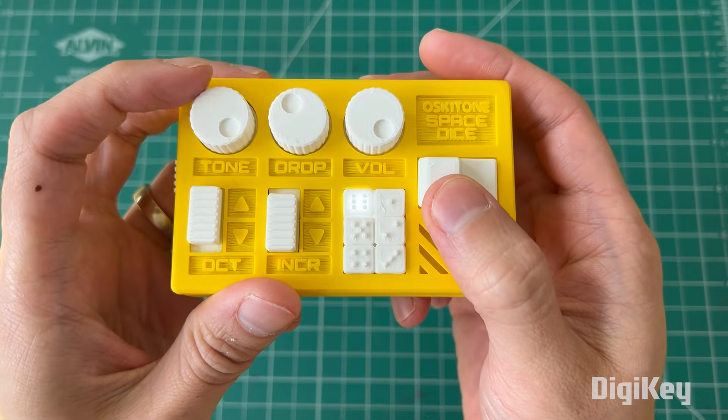This week on Maker Update: a robot with a walking neck, accessories for your Q, dice that go pew, and illuminated noodles for your ears.

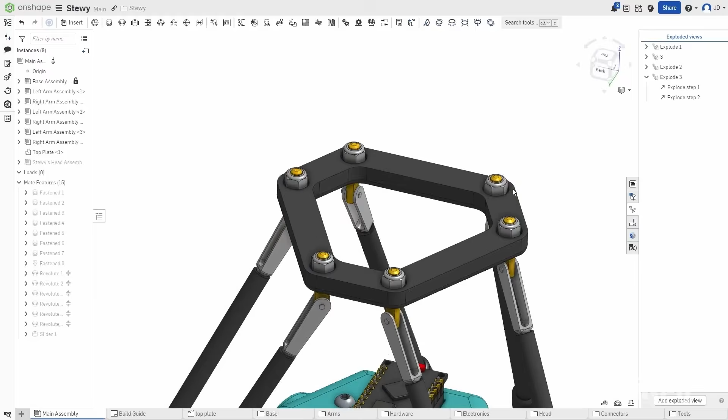The core concept here is a Stewart platform, typically a plate that can tilt in any direction based on the movement of mechanically controlled rods or actuators. In this case, the platform is Stewy's head, and the servo control joints that move the platform extend down to act as legs. So with the head and leg movement connected like this, you get this sort of crawling, head-bobbing motion when it's moving around.

It's not super smooth, at least not yet, but it has potential, and I think that's the most exciting part of this project. It's a solid idea that's not entirely figured out yet, and James is inviting us in to play with the design and improve how it works.

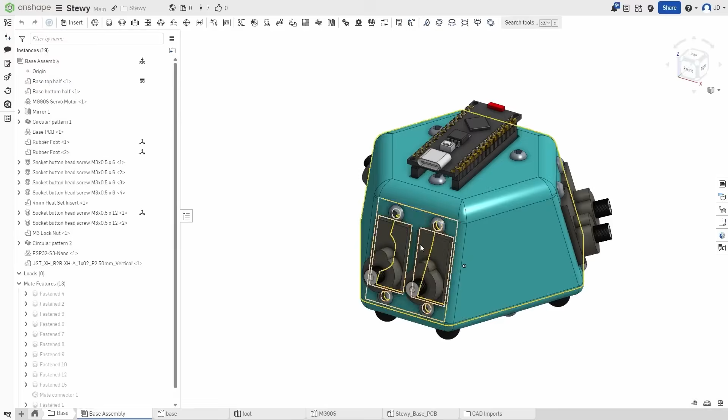In terms of electronics, you'll need 6 servos, which is pretty minimal for a project like this. All of those connect up to an ESP32 board in the base, which is where you'll also find an ultrasonic rangefinder for detecting nearby objects and a thumbstick for directly manipulating the robot.

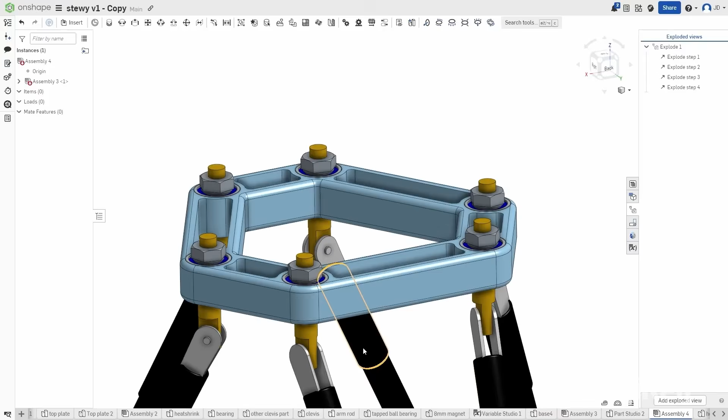I think the most interesting and unfamiliar part of this, though, is how the rods, servos, and platform all connect together. By placing bearings in the platform and encapsulating them as part of the 3D print, the hinged end of the rods can be bolted here and still allowed to twist and bend.

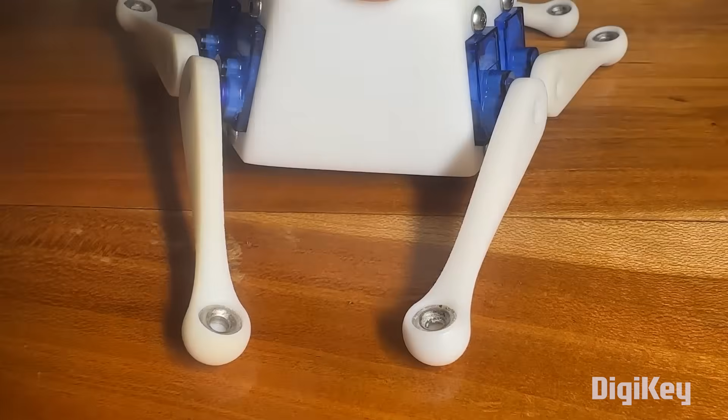But down at the servo end, the rods terminate in a kind of magnetic ring that rides on a threaded steel ball attached to a custom servo horn.

This means you have all of these joints that are deliberately designed to break apart in a way that's easy to reset. The complex, interdependent motion of all these rods means you're bound to move something past what it can tolerate. By having these magnetic joints, you really have permission to push the design and learn what it can take without spending hours in repair mode.

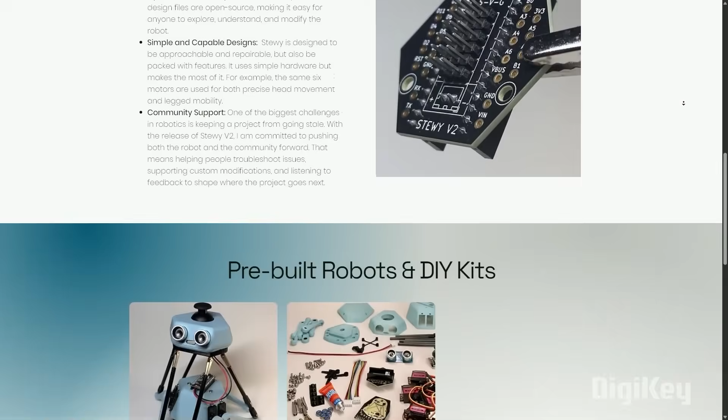Now for some news, and there's a lot to cover this week. Let's start with the bad news.

On their blog, Raspberry Pi has announced yet another substantial price hike to several models of their popular line of single board computers. Like the last increase, this one is again tied directly to the skyrocketing global cost and demand for RAM. To ease the pain a little, they've introduced a new 3GB version of the Raspberry Pi 4, sitting at around $83. If you don't need the latest, fastest model, maybe that's a good fit for your project.

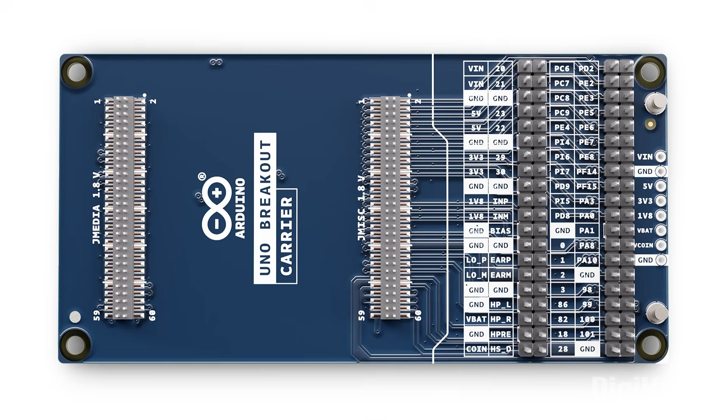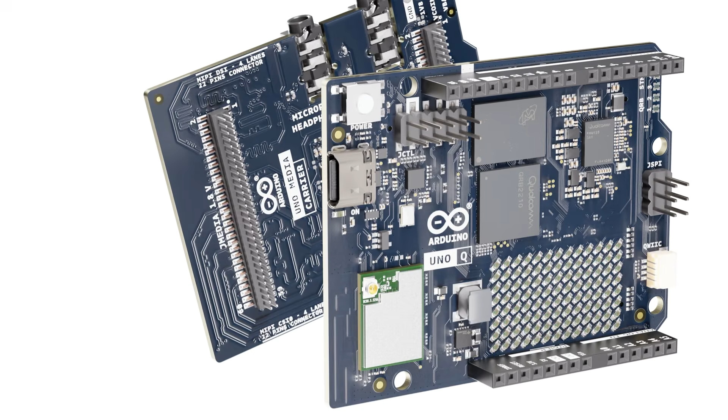From Arduino, we've got a new batch of products designed for the latest Uno Q board. The most notable, in my opinion, are these 2 expansion boards, the Uno Media Carrier and the Uno Breakout Carrier. Both boards are made so that you just push the Uno Q right onto a set of pass-through connectors. The Media Carrier offers connections for 2 cameras, a display, and audio input and output. The camera input conveniently uses the same 22-pin standard as the Raspberry Pi camera.

The breakout board is pretty self-explanatory. It's an inexpensive way to expose every available pin on the board, routed to headers that you can quickly prototype with.

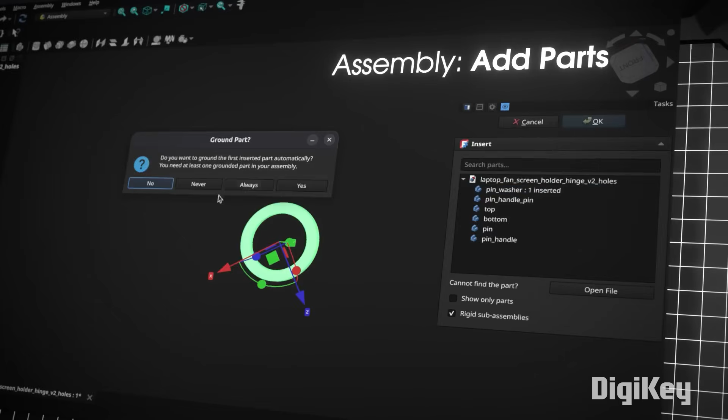The last bit of interesting news to share is that FreeCAD version 1.1 has just been released. This free open source 3D modeling tool now includes new options for lighting, widgets, snapping, sketching, creating holes, assemblies, and more. It's nice to see an open source tool like this thriving and gaining momentum.

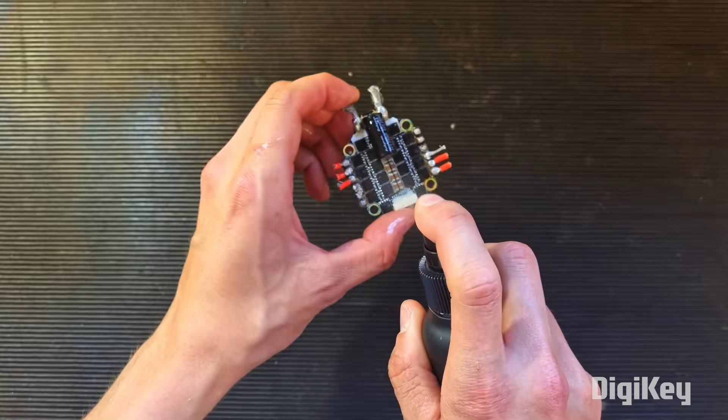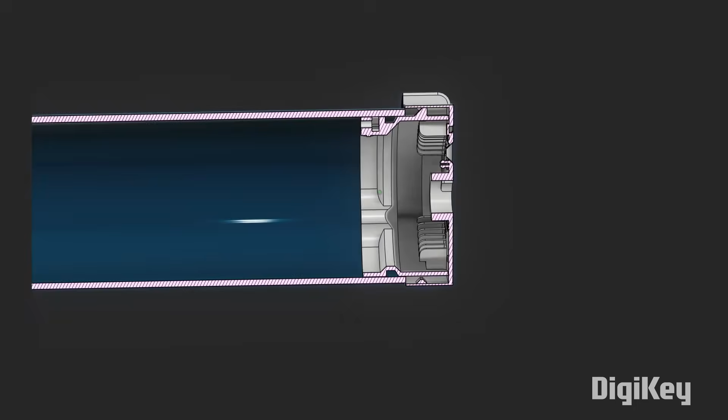Now for some tips and tools. On the Manafish ROV YouTube channel, there's a great guide on strategies and techniques for waterproofing your projects, even your electronics. From coatings to housings, material trade-offs, and specialty connectors, there's a ton of helpful information here. One quick takeaway is that nail polish is often a quick and effective way to coat electronics and keep moisture out.

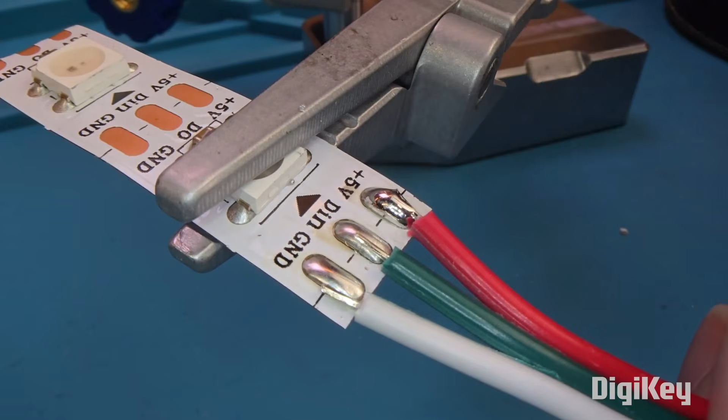On his channel, Will Donaldson has a collection of tips for wiring and soldering up LED strip. If you're new to working with LED strip or frequently frustrated by it, the whole guide is worth a watch.

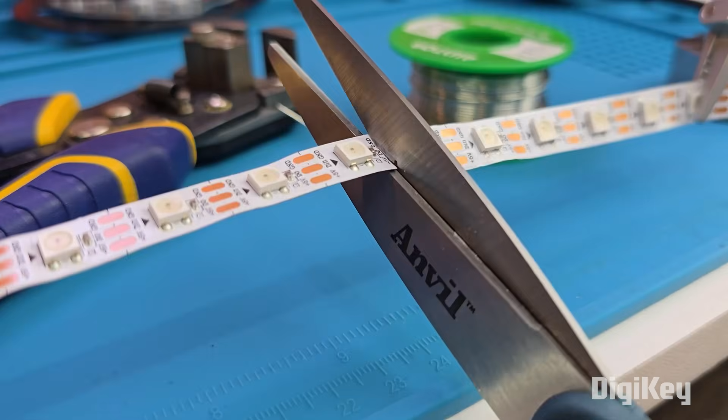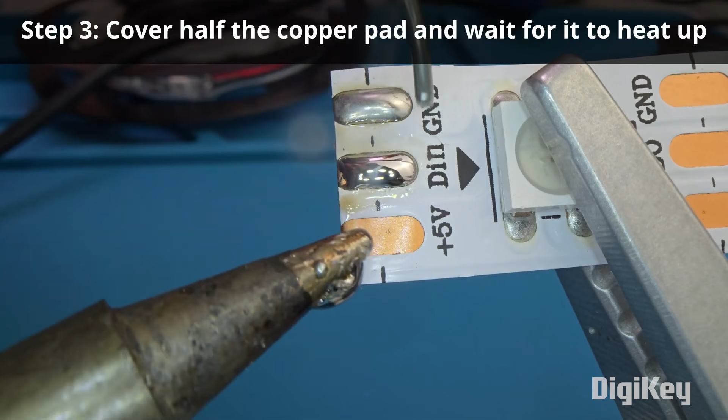But I think the best, most radical tip he offers here is to sacrifice an LED when cutting your strip into sections. If you do it right, you leave these full uncut pads to solder onto. Not only do these larger pads make soldering easier, but they lend themselves to stronger, more durable connections.